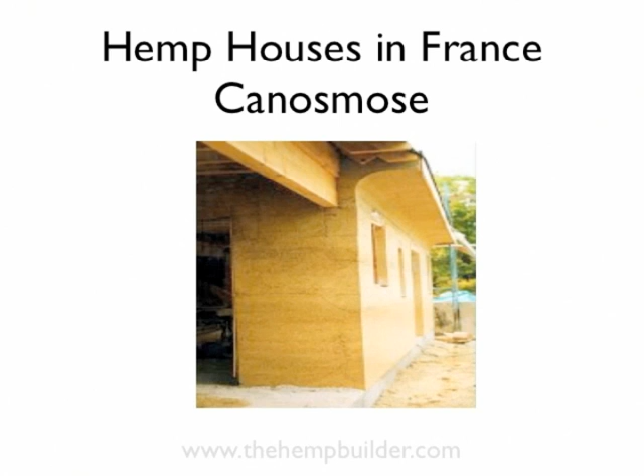We start with some from France from an excellent designer called Canosmose. Here you will see a number of different features and colours on the walls, different types of overhangs and roofs. You will find framing made from bamboo, as in this example, as well as regular timber frame examples.

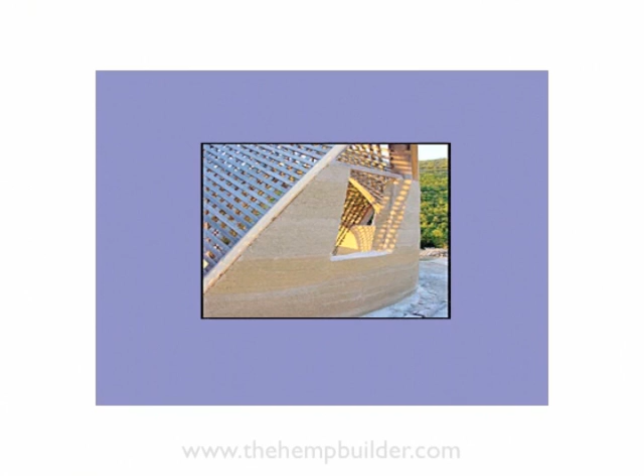As you may be aware, industrial hemp is a sustainable alternative to many industries, including building, plastics, paper, fuel, textiles, and many more. Today we're looking at the use of hemp in buildings. As you can see, you are not limited by any specific designs when using industrial hemp.

There are also a number of different methods used for hemp building. A lot of these here are from the original method developed over in France and now quite popular also in the UK, as you can see from some of these designs and drawings.

They are based upon the inside part of the industrial hemp plant, which is called the shiv. The shiv is processed from the industrial hemp stalk, separated, and then blended with a mix of lime to create a very strong, excellent insulating and breathable material.

Houses made of hemp could help combat climate change. According to researchers at the University of Bath in the UK, houses made of hemp and timber could help combat climate change by reducing the carbon footprint of building construction.

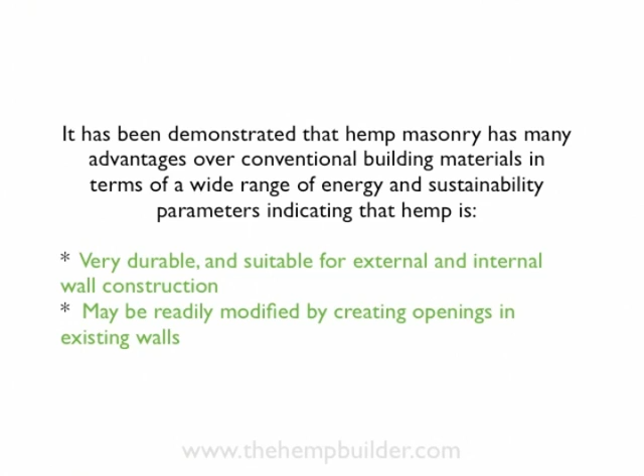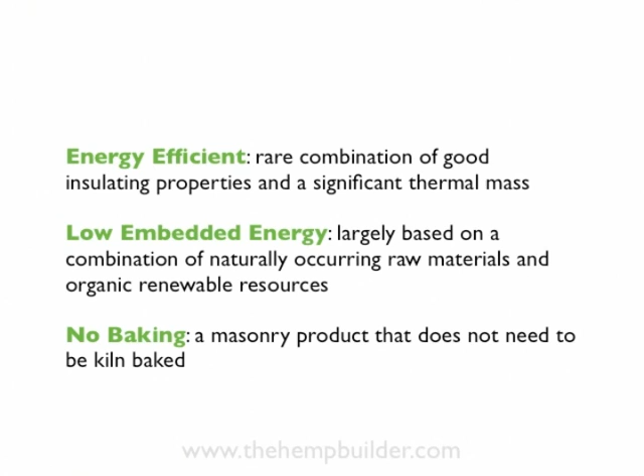Also, hemp is energy efficient. It has a rare combination of good insulating properties and significant thermal mass. It has low embedded energy, largely based on naturally occurring raw materials and organic renewable resources. No baking is required, a masonry product that does not need to be kiln baked. It's a carbon sink, suitable for carbon sequestration.

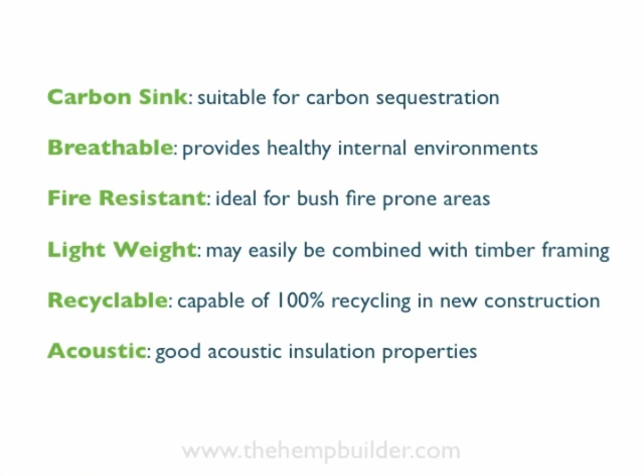It's breathable, one of my favourite uses, and provides healthy internal environments. It's also fire resistant, ideal for bushfire prone areas. It's lightweight, may easily be combined with timber framing, is recyclable, capable of 100% recycling in new construction, and its acoustic properties are fantastic.

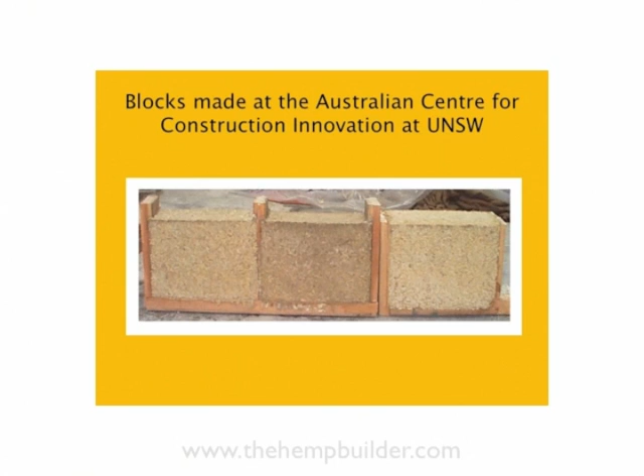Blocks made from the Australian Centre for Construction Innovation at the University of New South Wales were trialled over 10 years to find a new method that's even more sustainable for building with industrial hemp. Trial walls were created and trial methods of framing were assessed for shrinkages.

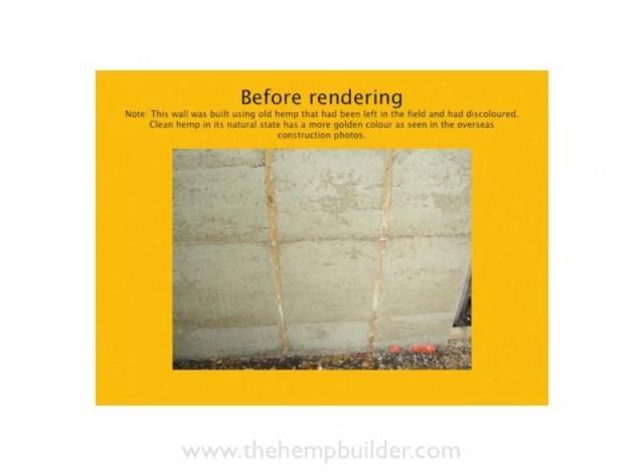Before rendering, hemp has a rather natural look and can be discoloured. With clean hemp, this is not so.

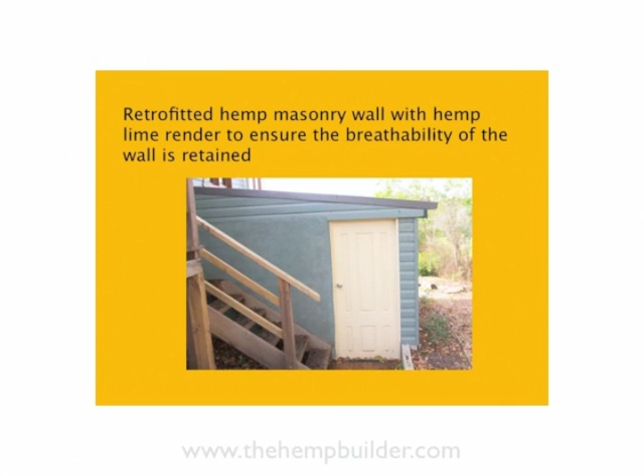The whole hemp stalk is used in Australian hemp building. This means that no processing is required and that you could even actually grow your own hemp for your own hemp house.

The first hemp houses were built in Ireland in County Monaghan. This small hemp building is built to a standard frame house with a mix of hemp shiv and hydraulic lime, structured around the timber. It's finished with a lime rendering, both inside and out.

Such buildings have the ability to be carbon negative for the construction, and the result is a healthy, breathable, energy-saving home.

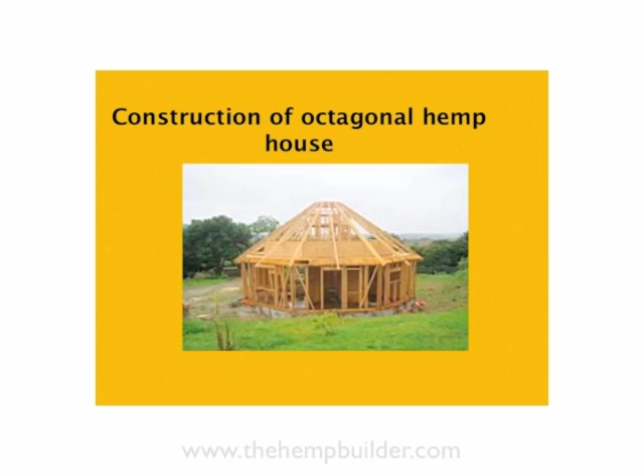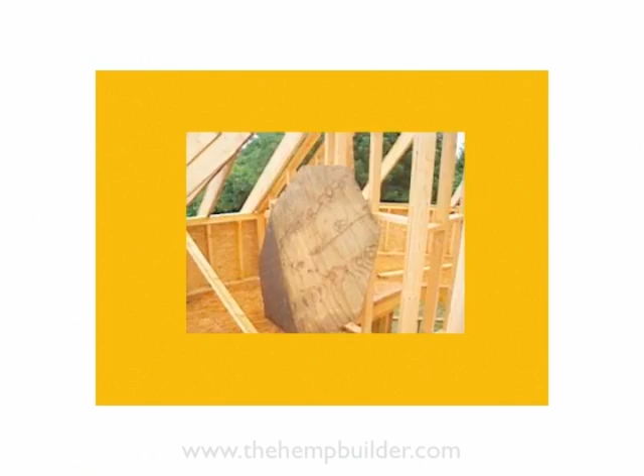Here's some further examples of some unusual and interesting designs that are all based around a timber frame, where hemp is being used as the infill material. It encases the timber frame completely, so the whole building is fully breathable, fireproof and rodent proof. It's also suitable for cold area locations as well as hot area locations.

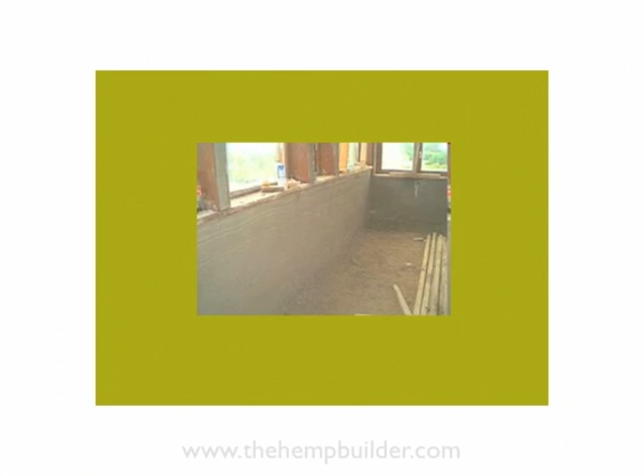Hemp houses in Switzerland are an example of this. This hemp house in Switzerland is built up off the ground to avoid snow gathering around the base of the walls in the winter.

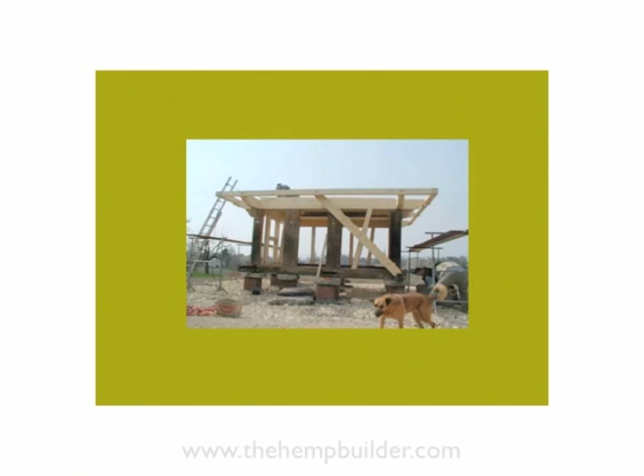They've chosen to allow this timberwork to remain exposed as a feature in this home.

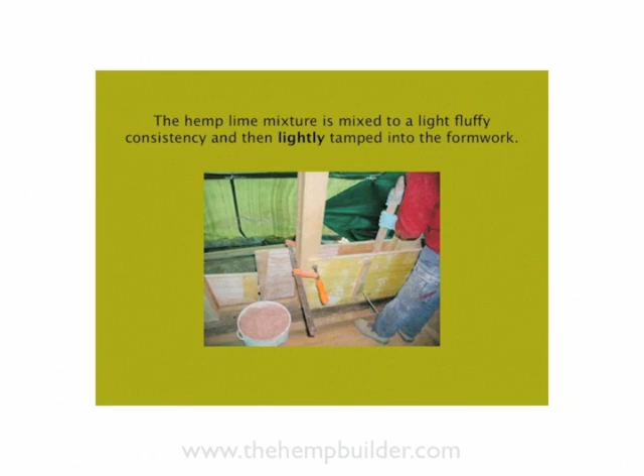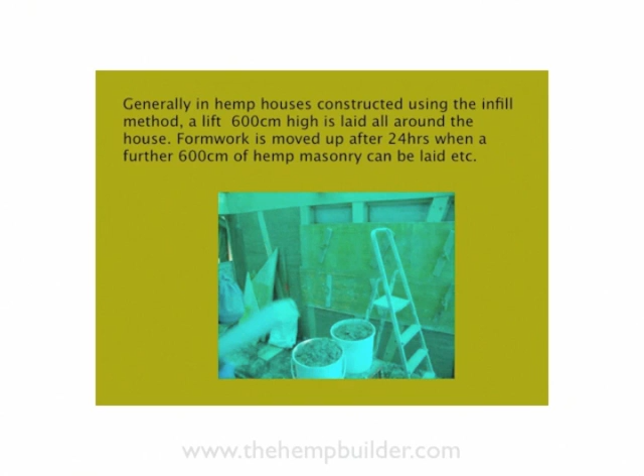The hemp lime mixture is mixed to a light fluffy consistency and then lightly tamped into the formwork. Generally in hemp houses constructed using the infill method, a lift of 600 centimeters high is laid all around the house. The formwork is moved up after 24 hours when a further 600 centimeters of hemp masonry can be laid. Hemp lime is also used as a roofing material.

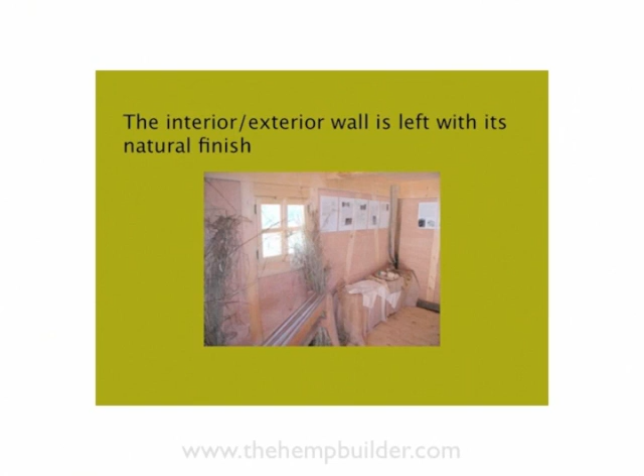The Suffolk housing project was an example where two hemp houses were part of a social housing development in the UK. Every step of their construction and subsequent occupation has been closely monitored by the Building Research Establishment to compare their performance with conventional brick and block construction. This project was undertaken by the Suffolk Housing Society of Bury St Edmunds with the support of the Housing Corporation and St Edmundsbury Borough Council.

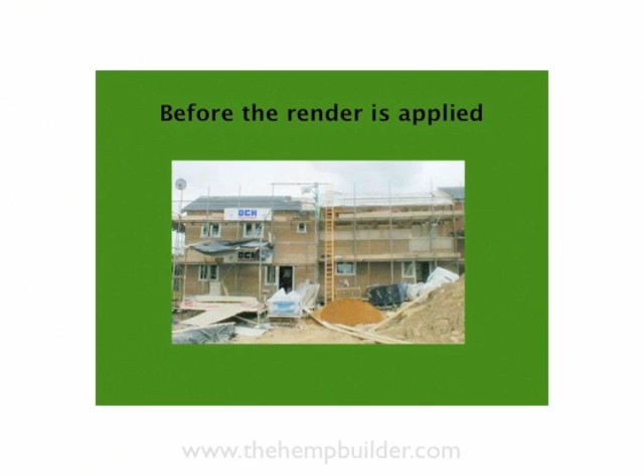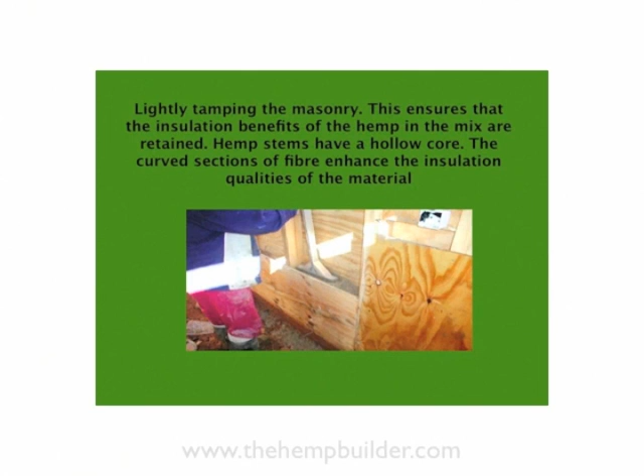Here it is before the render was applied, and this was the framing up. The same method of lightly tamping the masonry was used. This ensures the insulation benefits of the hemp in the mix are retained. Hemp stems have a hollow core, and the curved sections of fibre enhance the insulation qualities of the material.

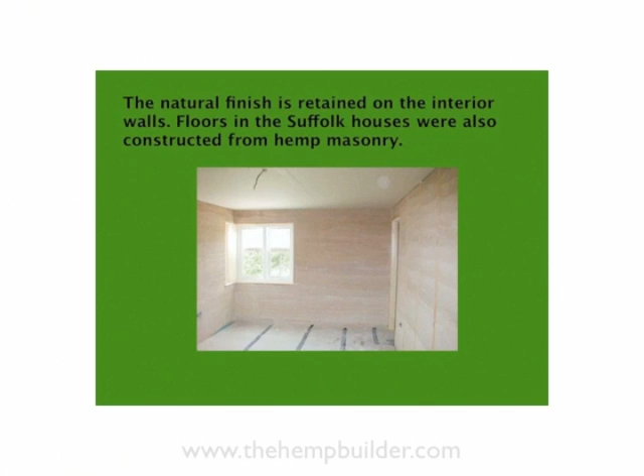The natural finish is retained on the interior walls, and the floors in the Suffolk house were also constructed using the same hemp masonry. Installing electrical cables is quite possible and simple.

Some larger examples of hemp buildings include the Adnams Customer Service Centre in Suffolk, UK, with 8,000 square metres of hemp. The decision to build the Adnams Brewery building from hemp masonry rather than conventional masonry meant that 500 tonnes of carbon dioxide emissions were saved during the building process, as hemp masonry captures carbon from the atmosphere and locks it into the fabric of the building.

According to Professor Woolley from Queen's University Belfast, the warehouse development has catapulted this environmentally friendly technology into mainstream commercial building.

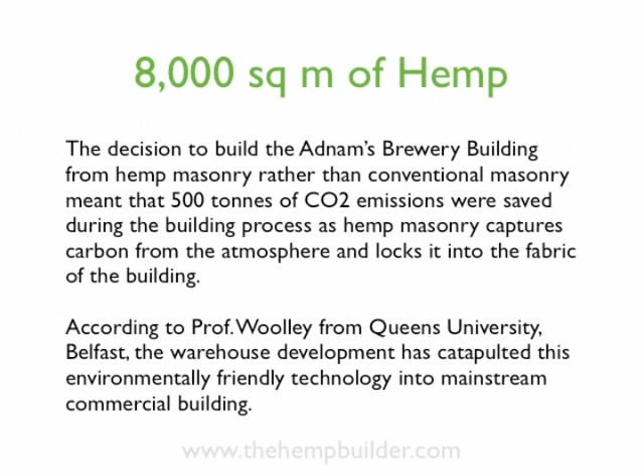The goals of this amazing building were bringing values to life. They wanted minimal environmental impact, maximum operational efficiency, and superior returns on investment. They really wanted a great place for people to work. This customer service centre itself was 4,400 square metres, with 60 to 70 staff on site, serving 1,000 customers today.

They wanted a flexible layout with no columns inside, and the building position and design were also crucial. Other construction materials included curved glulam beams from controlled sustainable sources with high insulation properties, sourced from Scandinavia's longest glulam beam in the UK, plus lime hemp for its thermal performance, passive regulation of humidity and temperature, and carbon sequestration.

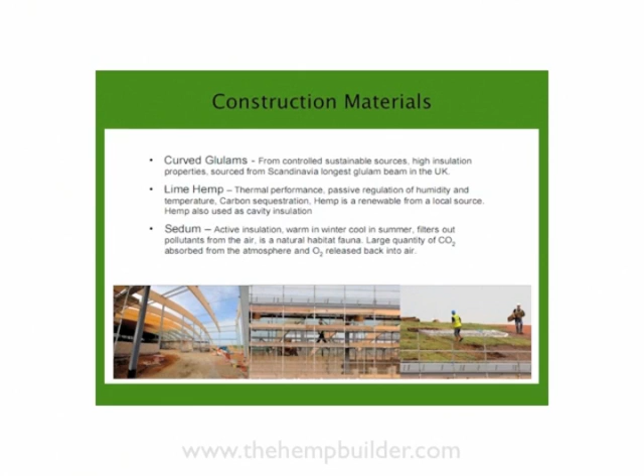Hemp came from a local source and was also used as cavity insulation. Sedum was used as active insulation, warm in winter and cool in summer, and it also filters pollutants from the air. Large quantities of carbon dioxide were absorbed from the atmosphere and oxygen released back into the air from this material.

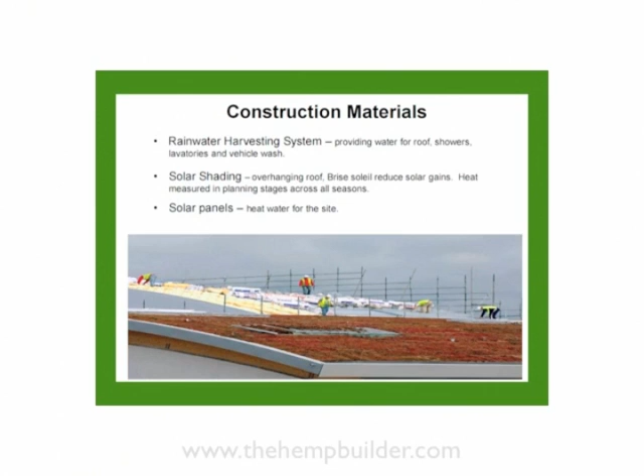Rainwater harvesting systems were also used, providing water for the roof, showers, lavatories and vehicle wash. There was solar shading over an overhanging roof, brise soleil, which reduced solar gains, with heat measured in planning stages across all seasons, and solar panels heat water for the site. Truly a building to be proud of.

One of Lime Technology's latest projects in the UK is one of Europe's leading eco-centres, the Centre for Alternative Technology, built using hemp walling in Machynlleth, North Wales. The project for the Wales Institute for Sustainable Education, WISE, is designed as a state-of-the-art three-storey environmental education centre including a 200-seat lecture theatre, workshop spaces and student accommodation. I highly recommend a visit to this building.

Hemp building in Australia is a new industry, an opportunity for Australia to build on global knowledge. The above examples are ideal technology for Europe using the European lime process of decorticated hemp. Australia currently does not have any processing technology or the same lime, so hempcrete requires imported ingredients, which is not affordable or sustainable for Australia today.

At thehempbuilder.com, we share 10 years of research and development in Australia in conjunction with the University of New South Wales, where we've shown a way to build with Australian whole hemp stalk where very little processing is required. The Professor of Construction Innovation at the University of New South Wales has helped create a stable binder using local Australian lime and hemp. It's now available for affordable housing, thanks to Clara, LimeTech, Steve, Allen, Martin and Tom for their help in creating this presentation.